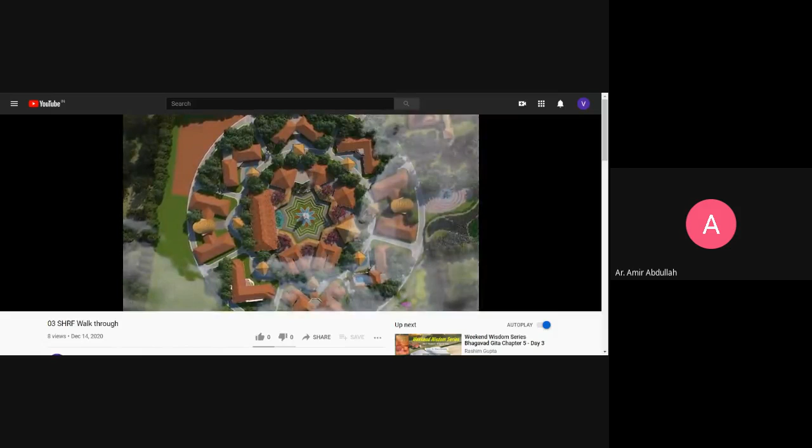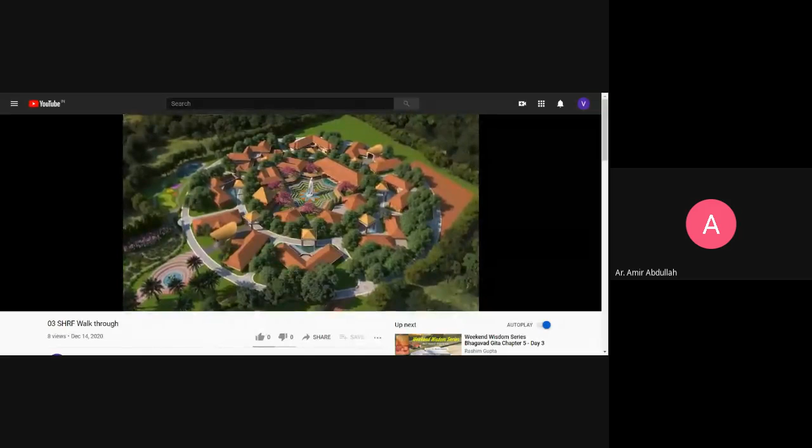Where the profound silence becomes the greatest eloquence, where the prayers pave a path to perfect salvation, where the soul within blends with the cosmic power. There, a divinity shines that cures and heals. Welcome to experience the power of meditation and yoga combined with spirituality. Divine Park, Sarvakshema Hospital and Research Foundation at Saligrama.

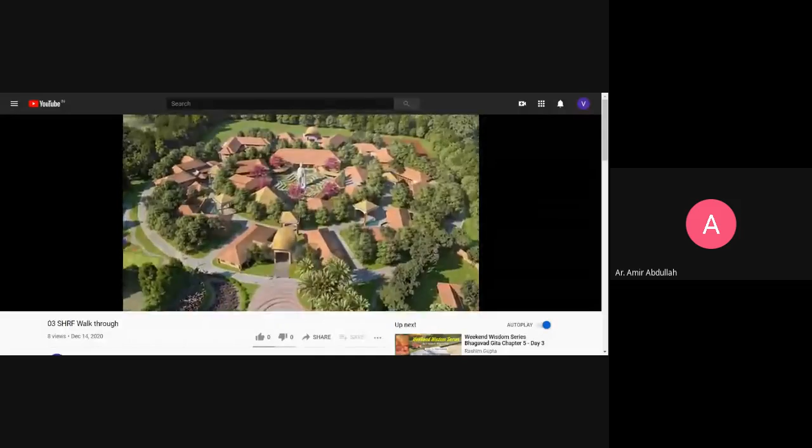Sarvakshema Hospital and Research Foundation is located in 11.4 acres of land amidst the serene environment, overflowing with the melody of nature. The entire area speaks of greenery and is preserved as nature holds it.

Eco-friendly ponds along with step seating facility, flower beds, shaded trees with benches underneath, reflexology walkways, all together enhance a tranquil ambience. A large area is given to the cultivation of a herbal garden with a variety of medicinal plants.

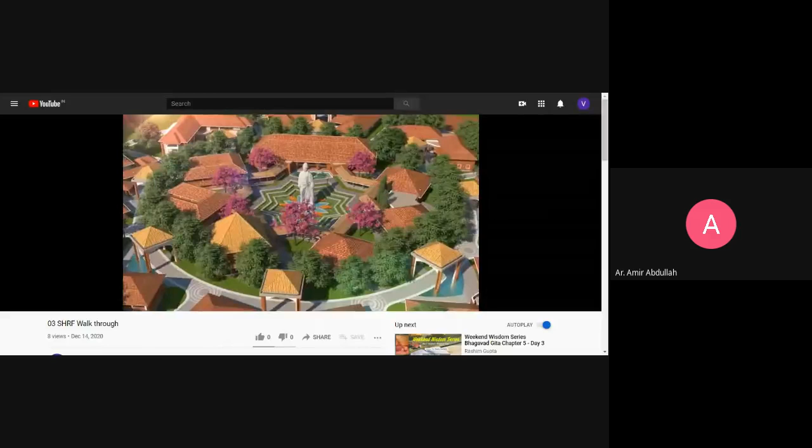Centered by a huge lotus, the hospital complex is unique in its design and layout, around which the yoga studio, meditation block, naturopathy treatment block for both male and female, dining hall and consultation block stand connected. Behind these, the facility of deluxe rooms and cottages, inpatient and outpatient block, Tulasi block, research block are arranged.

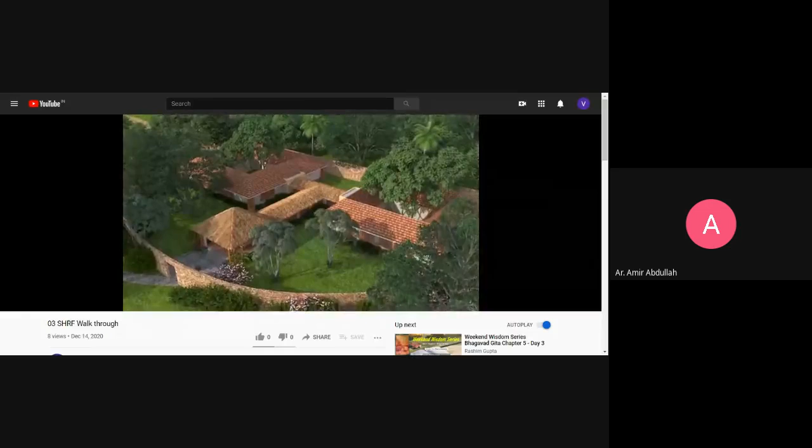A wide area is kept apart for sacred rituals and gatherings. The holy abode of Guruji is also within the premises to assure his blessings, and VIP cottages are nearby. The hospital is wholly constructed using granite, laterite stones, bamboo and other materials direct from nature.

A stone statue of 35 feet high of Swami Vivekananda stands in the center to welcome. The lotus flower, with its petals and steps around, is an appealing architectural magnificence.

Indeed, a fine place to rest and relax. Traditional charm is retained at all places with stone pillars, bamboo and tile roof, and well-connected corridors.

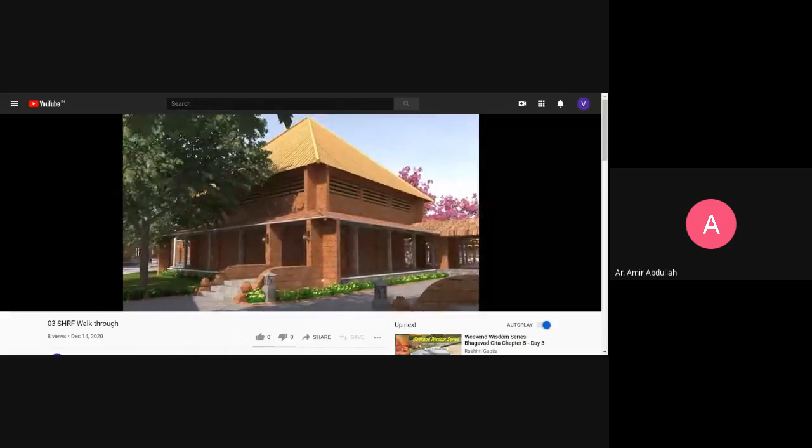Internal pathways are retained as walking and cycling tracks, giving easy access to all areas. A calm and comfortable meditation hall is also provided.

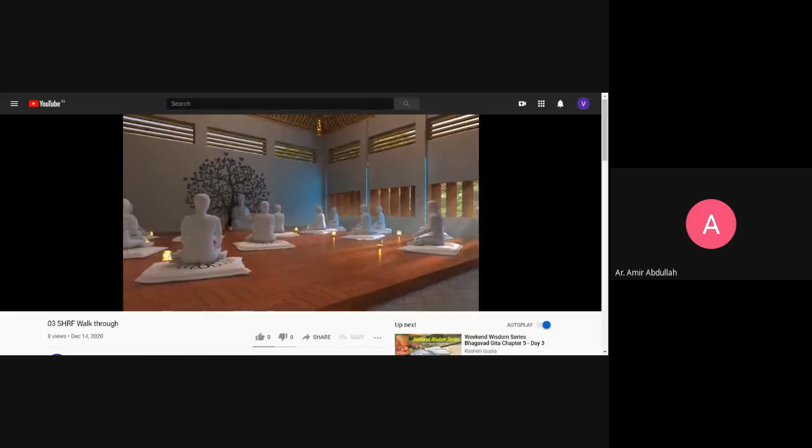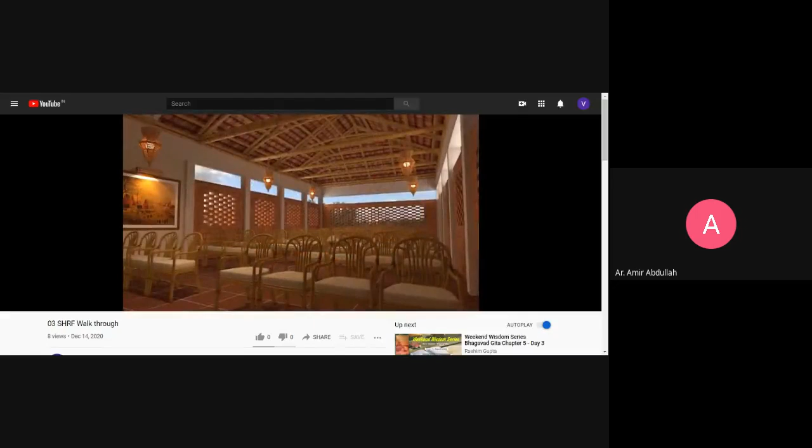The facility of a swimming pool with clear water, a multi-purpose hall, and a full-fledged yoga studio are provided. Sarvakshema Hospital and Research Foundation - a touch of healing from nature.

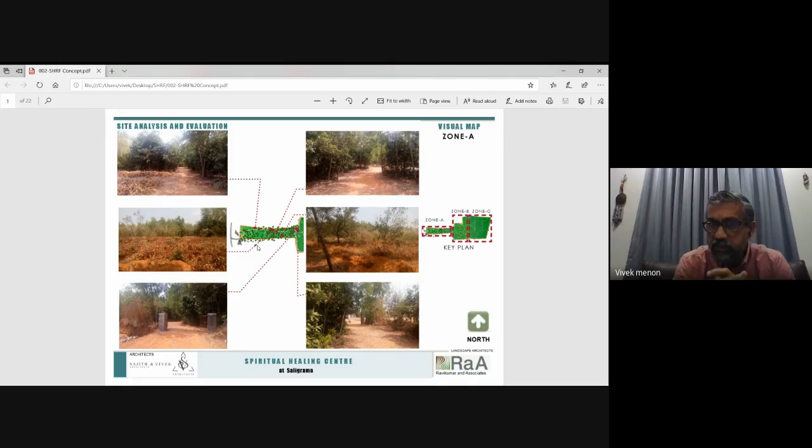When we came to the site, we noticed this first extended portion, roughly around 3.5 acres, and we were very clear there would be no development in that portion, because we wanted the feel of coming in through a healing garden. So we always conceptualized having some non-constructed area and treating it like a healing garden space. We were very clear at the beginning because it gave a very good feel and approach to the overall complex. Subsequently, as you go to the rear portion, the site gets a little bit bigger.

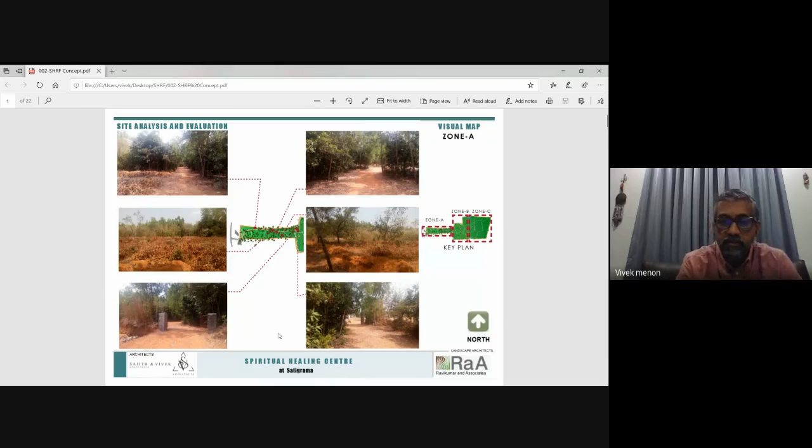So we thought that's the area where the development should happen, and certain decisions started forming in our heads. Now this is more toward the central portion of the site, where you can notice there are some existing trees, some wells, a sarpa mandapa, and overall some good trees.

More or less, we found that this was the area of the site with a relatively flat terrain, so it was easier to develop on this flat terrain rather than work on slopes, which would probably get very extensive on foundation works. Overall, this looked like the most ideal or plum area to put forth the structure.

As we moved to the rear portion, we noticed there were some rainwater natural drains around the property. We knew these had to be revived and recharged. We had 3 water bodies which we were clear we would definitely recharge and try to improve, creating catchment areas for the water.

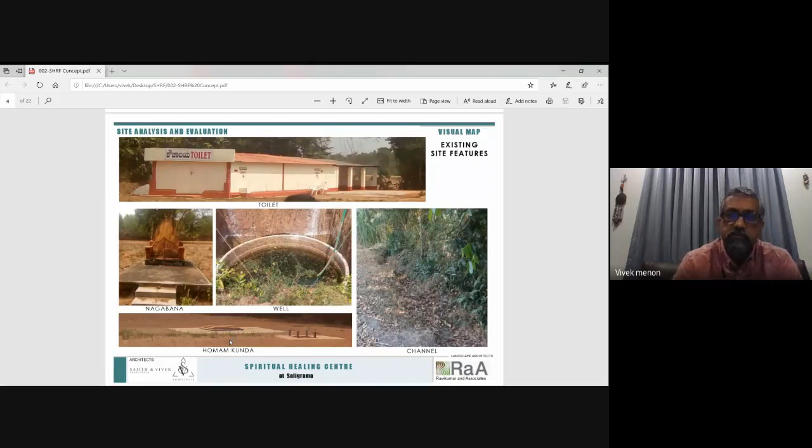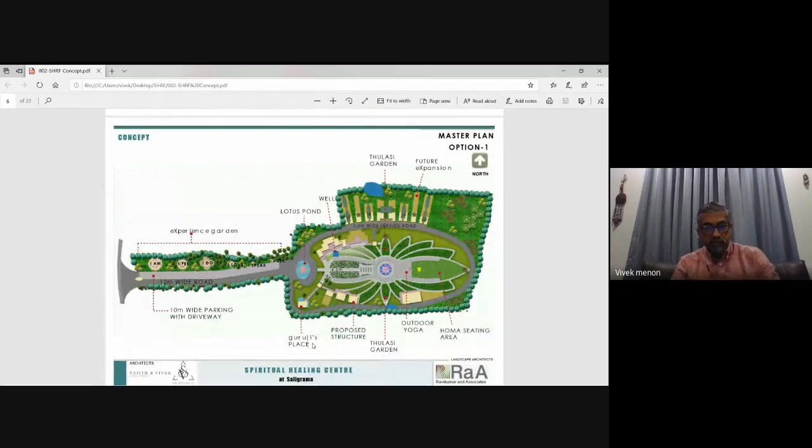Some vegetation analysis by a landscape architect. So now what we did is, before I go into the slide, we want you to understand what is the context based on which we are planning to design. The context here is nothing else but the fact that...

the client was very clear that he wanted a center which had the teachings of Vivekananda imbibed with yoga practices and training. So it was very clear that the context would be with respect to Vivekananda and his teachings and his outlook on life. So we centered our thought process on the design around Vivekananda, and then tried to arrive at some kind of concept.

To get into a concept, we did a little bit of reading and tried to understand what in nature can be emblematic of having faith, believing in yourself, or living an unwavering faith to live a better life. These kinds of things we were thinking. So it dawned upon us - why don't we look at the lotus form, which was quite popular also amongst Buddhism, Hinduism, and many other areas.

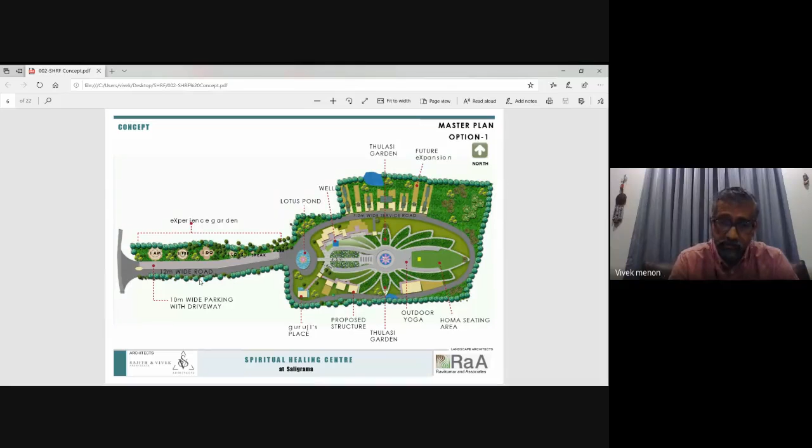We also considered, towards the northeast corner of the property, a huge open ground where they could continue to have their homa. The site was sloping from west to east, with a perfect exit point for water in the northeast corner going into an irrigation canal, so we were confident it would be recharged and kept alive.

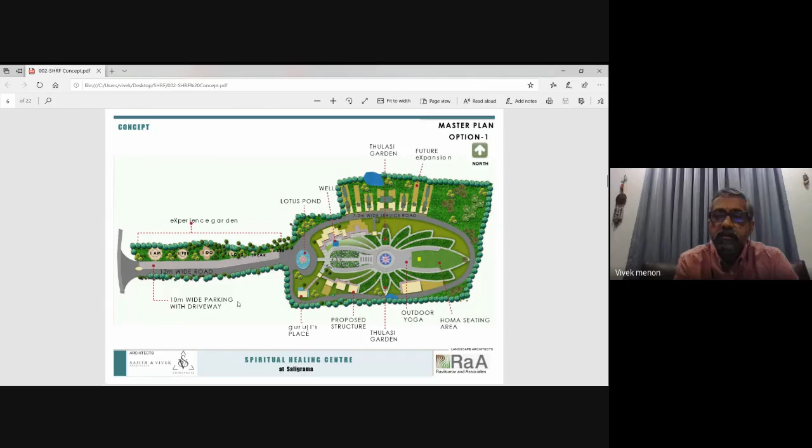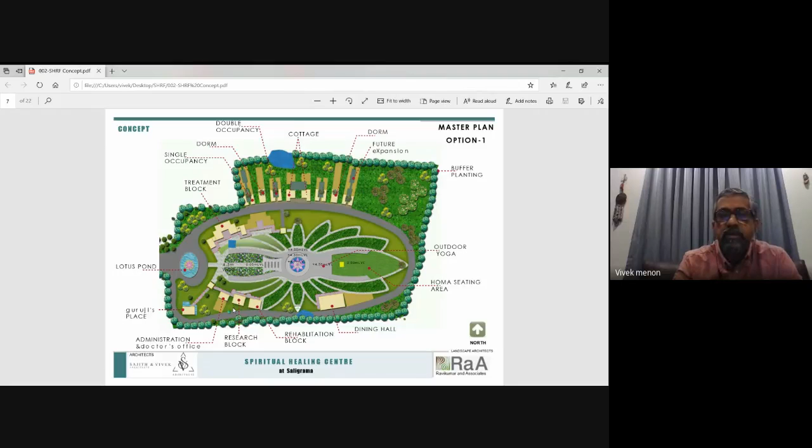So this was one thought process we had, and then we moved on to some visual ideation and started to arrive at a kind of massing study. This isn't completely done, but we were in the process midway.

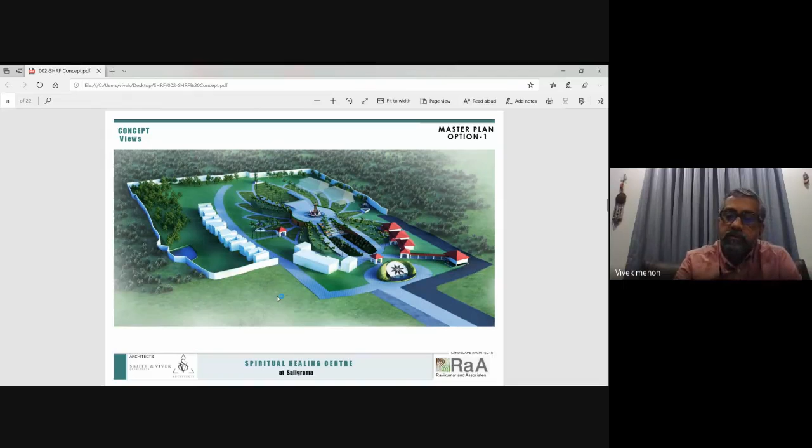The idea was to have a complex developed around this central plaza in a very elliptical manner. So that was one of the ideations we had—some sketches, then developed into 3-dimensional renders to give a feel of the space.

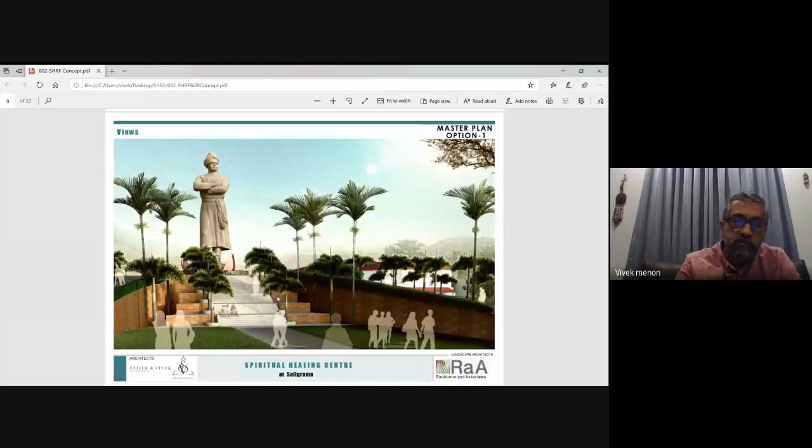And that was the first concept. Now, this is the second option that we worked on.

It's more or less the same concept, where we have the first area of the site not developed, and then we create a strong access point slightly pushed in. And here, what we basically did is...

created 8 quadrants radiating out into concentric circles, and we thought in those 8 quadrants we would provide the activities. Here too, at the center, there was a water body with a statue of Vivekananda, and our complexes around it.

So here we had a concept of phase one and phase two development. Phase one would be the inner ring development, and phase two the outer ring development. The rest is more or less similar—keeping the northeast open for the homam and letting the water exit.

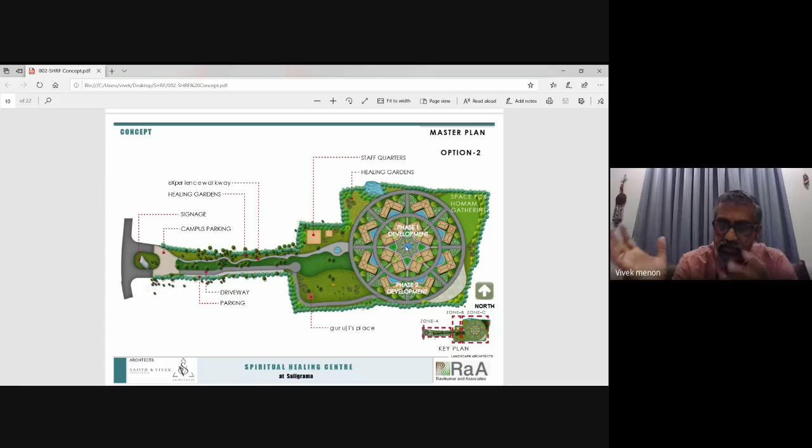So we were thinking of swales all around the property, so the water would be carried from the entire site to the northeast corner. Then we had ideas for services, everything integrated.

As you go further, just to give you an idea, we felt this was a better option, so we started looking deeper and deeper into this.

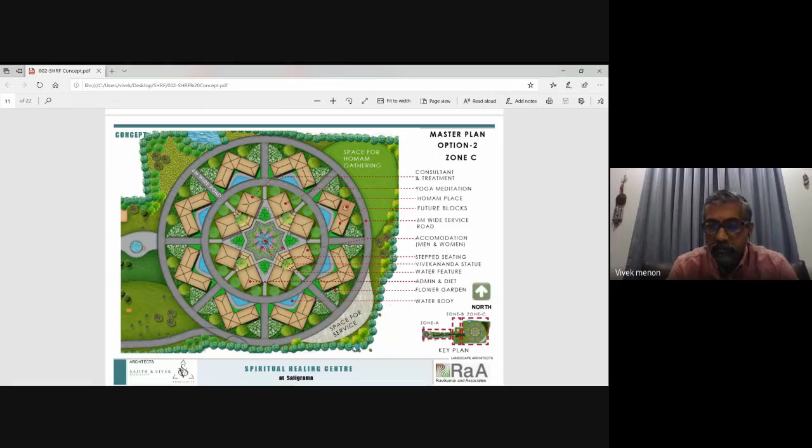This is just an enlarged view of the central complex, where you see the two concentric circles, which are basically driveways and pedestrian walkways—wide enough for vehicular access in case of emergencies, with widths of 6 to 9 meters.

So you see the central core, and then you have the water body in the center, and you have all these building complexes overlooking the central core.

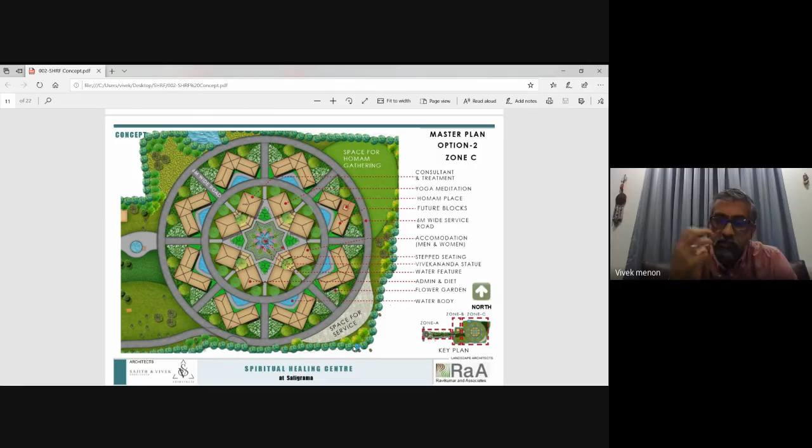Here we struck a good thought process where we felt that his philosophy and teachings are always that you need to try and understand yourself from within, because the saying goes that if you talk to yourself, you realize you have a very interesting person inside of you. So we thought this kind of concept makes the buildings look inward, so that everything starts from within you. This was giving a better feel of a central core and looking-inward concept. We were really excited about this concept, and we went forward with it.

So just showing you how phase one could be done, because projects of this scale will end up having different phases of development for various reasons. One could be that the initial start may not have much in terms of customers, and even your funds; you need to have the funds in place. So they wanted to start small and then grow bigger. Future expansion is always important.

If you notice here, you see the 6 meter wide roads which connect the inner and outer ring, which are basically pedestrian walkways.

Now, one important thing about this project was the client also gave us a daily routine as to how a person should start his day and end his day. So we had a time-wise schedule starting from 5:30 in the morning to 9 in the evening, organized in such a way that they're trying to set a kind of regimen in your life, because that will obviously improve your health. So that's a very important part of their program here.

So these concentric walkways always made it good for them to have their walking. They have some kind of calculation where you need to walk a minimum of 9,000 or 10,000 steps, which is good for your health in a day. So these concentric circles also gave us that design requirement to be provided.

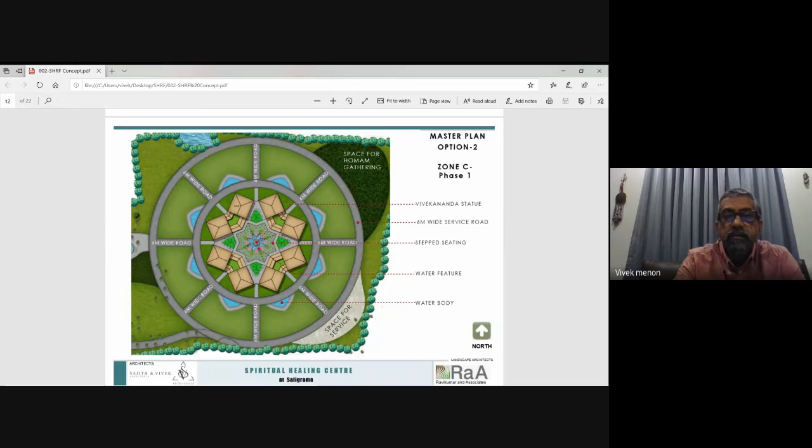So just showing you how the entire thing would happen in phase two. Just a comparison here - basically not much different, but we have connecting corridors and walkways in between the blocks. So we have kind of a stellar form in the center, but on the outer sides you have a circular form. Some Google SketchUp renders.

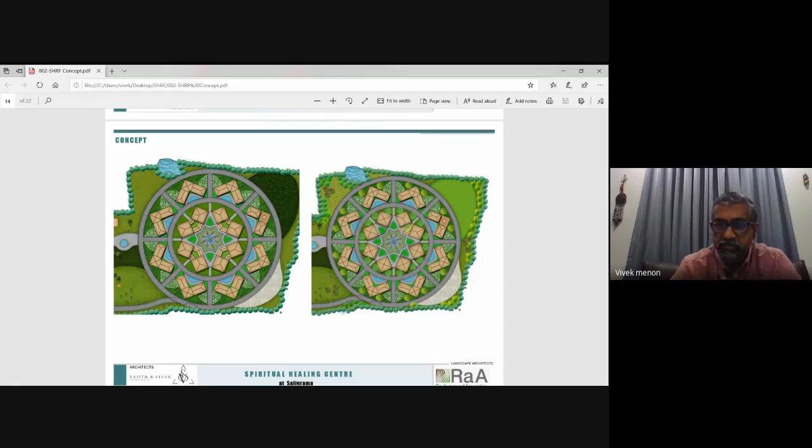So what happens is, if I go back a little bit, in this kind of design there are so many open vista points between these buildings. You never feel like you're walking between dense structures - there's so much openness between them. You have connecting walkways, landscape patches, water bodies, and you get a beautiful view towards the central focal point from many locations. So you really get to enjoy the central core from all around.

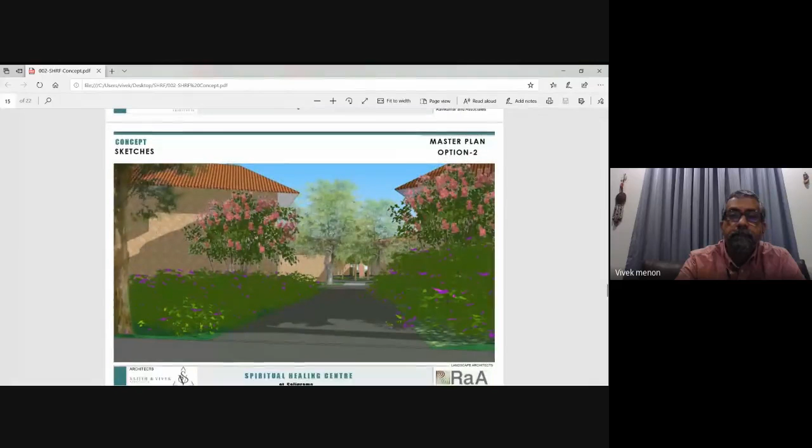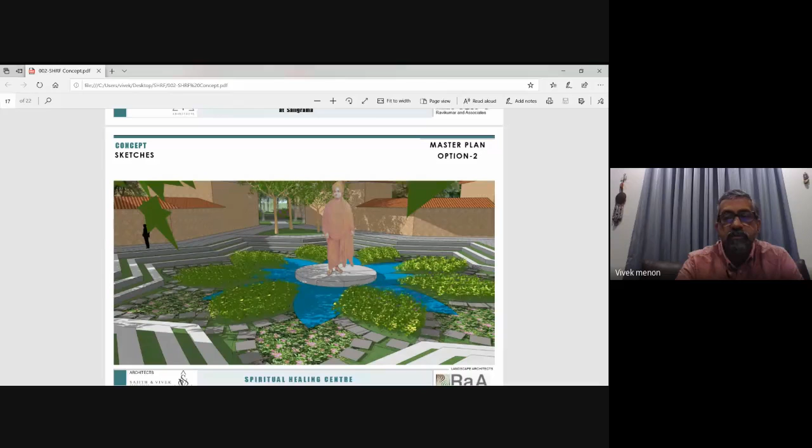So this is one good thing about this kind of design - some views between the structures, a little bit of the stepped seating, central plaza. We have the Vivekananda statue, and we wanted some lotus flowers and other flowers, flower beds. It becomes a very interactive space for discourses.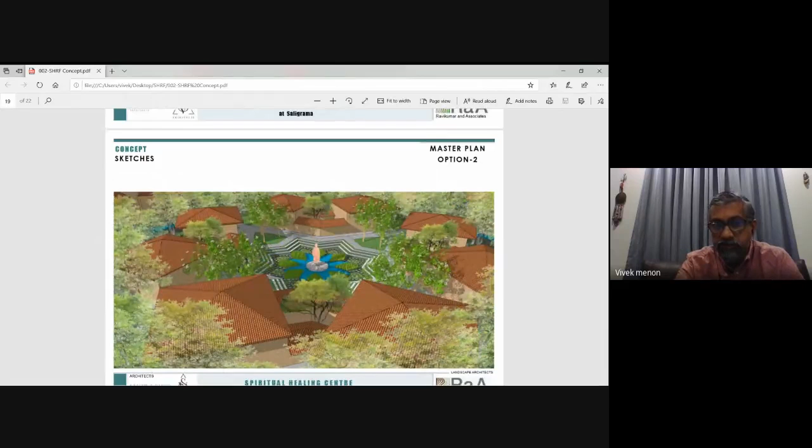I hope I'm not moving the slides too fast. Are you able to see? Yes sir, it's visible properly. Yeah, but am I moving too fast? Is the slides moving too fast? No sir, I think it's all right, okay.

An overall aerial view of the complex.

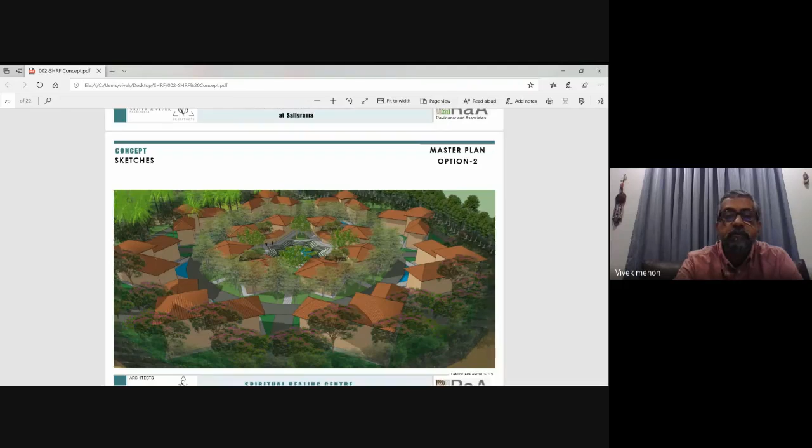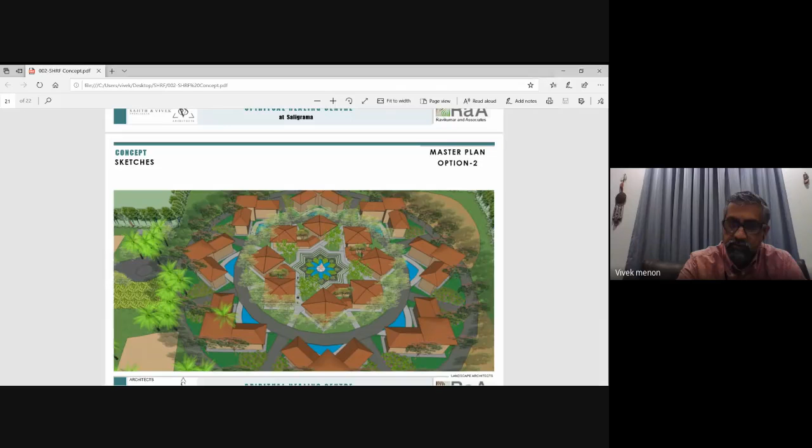So I want you to understand this is all conceptualization, please - this is part of the conceptualization, so this has not become concrete as yet. What I showed you in the video earlier was something that became concrete. What I'm trying to do is walk you all backwards. I'm trying to show you that the walkthrough was something we kind of decided we wanted, but this is what was prior to that - how did we get to the walkthrough is what I'm trying to share. So this is all before the walkthrough happened and the design was selected. That's why I'm showing option one, option two.

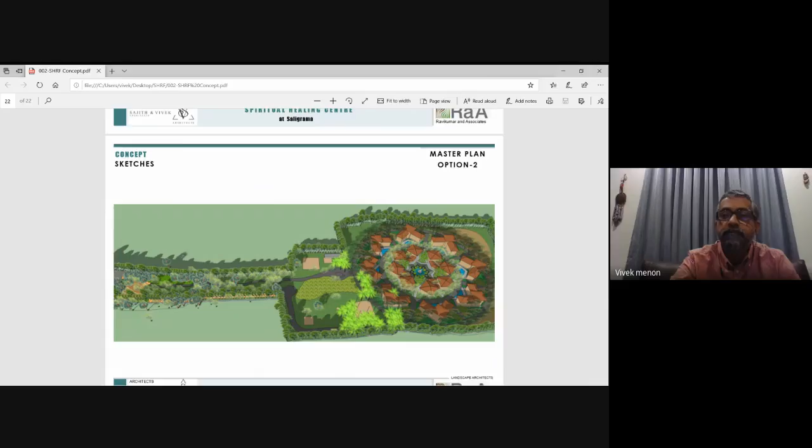This shows the entire site. Now this is very important - this is something I'd like the students to understand. Here I'm just going to focus more on activities on the site, which is very, very important for a project of this nature, or in fact for any project. If you get yourself involved in the site, it's very nice because you can see how the product turns out.

Basically, this is going to show you a bit of the construction drawings, so you can understand the construction areas, showing you the building plans and things like that.

Central core, so phase one was taken up. The central core area was to be totally developed, and we had two meditation halls, a research block, a big auditorium and a dining block. We had proposed the outpatient and office block and an accommodation block.

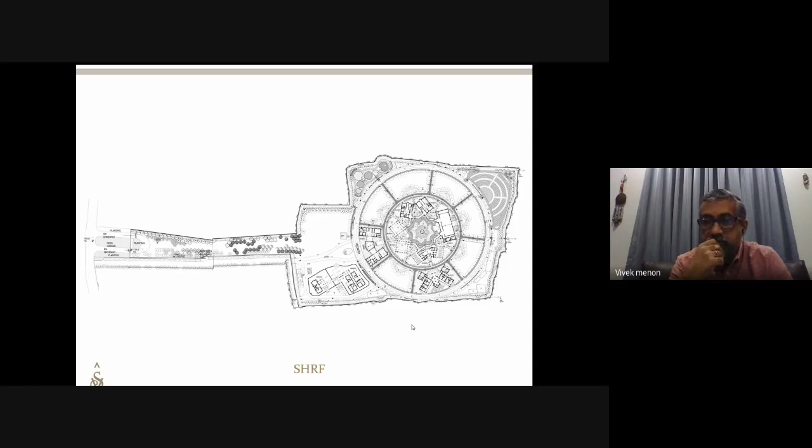Initially they did not want to go up for the entire built up area, so as of now, phase one development is at 60,000 square feet. It's good to know there's a lot of places for future expansion. So all these vacant grids, we have requested them to treat as nurseries, because you need a lot of vegetation to be done around this property. They will be treated as nurseries for the moment, so by the time you can replant them and move them to their respective areas. This is a suggestion given to them.

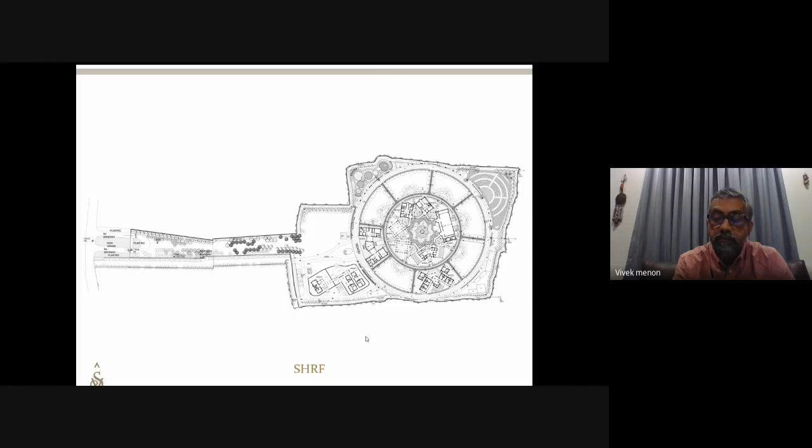Just showing you a little bit more closer view of the complex. Do you see my cursor actually? Yes, it's visible. So this is the administration and the outpatient block.

So we created a kind of grand imposing entrance here, and then through here you come into the central core complex, at the center of which we have stellar seating, a water body, and a Vivekananda statue. We decided that we'll try to put up a statue of Vivekananda, almost 30 feet high, which would be the main focal point of the design.

And if you come into the inner circle, to the left and to the right immediately, we have the meditational blocks. Then to the left, as you go in a clockwise direction, we have the research and treatment block. The long elongated block towards the northeast is the auditorium block, then further down is the dining block, and behind the dining block is the accommodation block. So we have around 75 bed accommodation provided here.

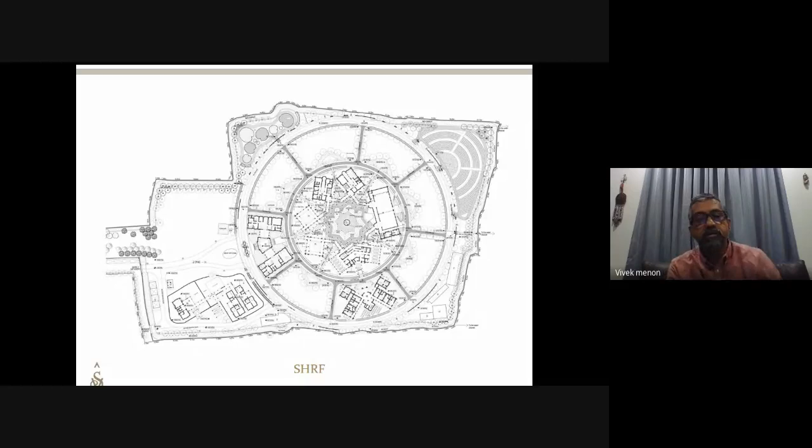So this is what I'd like to show. This is very interesting, I think a very important part of the entire project, according to me, because I am also new to doing work in Karnataka, especially towards Manipal, Udupi, Saligrama.

There's a lot of these materials available, and I was really excited to try out laterite, granite, and tile roofs. Yes, we've used a lot.

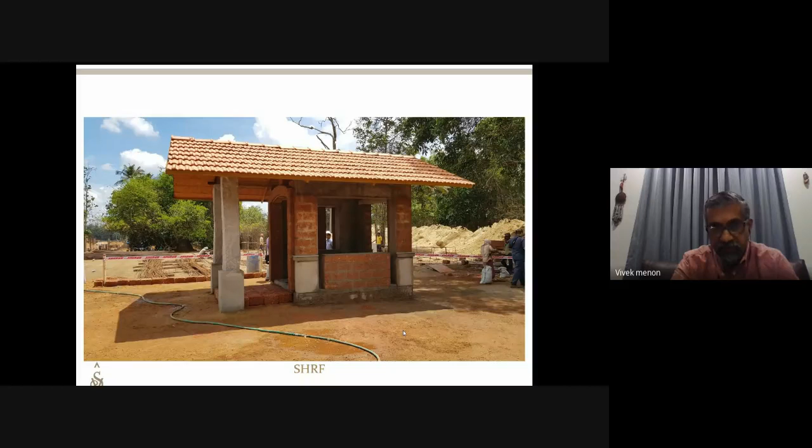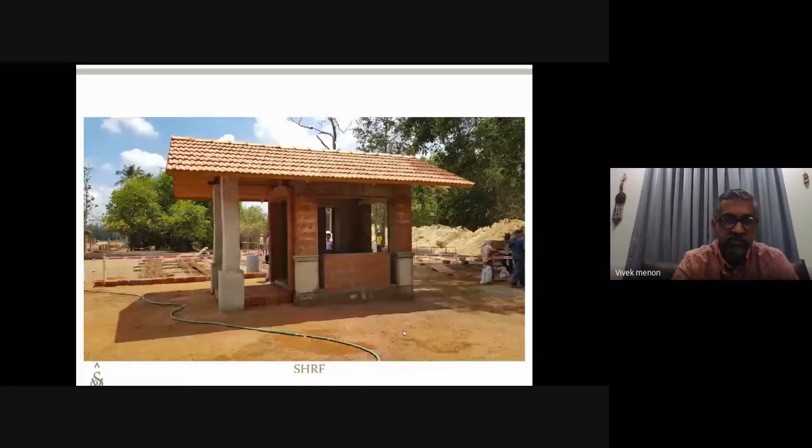Surprisingly, these were things done many years ago, but today these are things which are getting more and more difficult to do. By doing this exercise, I was somehow able to clearly drive in a message to all the consultants and the client: this is the look and feel that I'm looking at.

So we started comparing the size of a laterite stone with the granite pillar they did as a sample. We reduced the sizes to the width of a laterite stone, but we felt this was too bulky. The mock-up done was too bulky.

We also wanted to explore the concept of using bricks as a kind of louver to funnel in the northeast and southwesterly winds. At the same time, these vertical fins would act as normal security grills provided into the room. We wanted to avoid normal metal grills, and thought these fins by themselves would act as security grills to all the spaces.

So we made sure the north and east facade of the buildings had the louvers focused in that direction, whereas the southwest sides had the louvers focused in the opposite direction. It was all looked into, and this became an interesting element of our design. So we tried with laterite, and then we took up with bricks. Ultimately we ended up doing it with bricks.

But we had a lot of problems with this because it seemed to be taking a lot of effort, so people didn't want to go there. The contractors didn't want to go there either. So we thought of using these old concepts of granite lintels, and got a mock-up of that done.

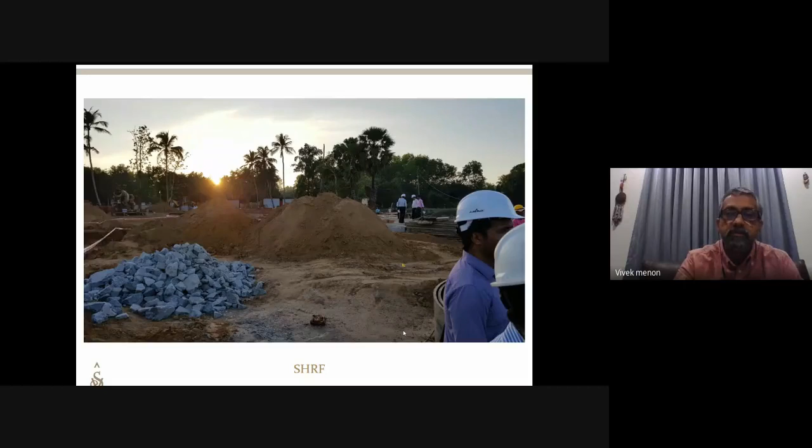So when we broke ground, we started moving forward, and if you notice, everyone is involved. We had some drone shots showing how the work progressed, and today it's very nice to have these drone options to really monitor and understand how your project is shaping up. This is one great thing happening today - being able to use drones to capture a lot of imagery, and monitor construction activities very well this way.

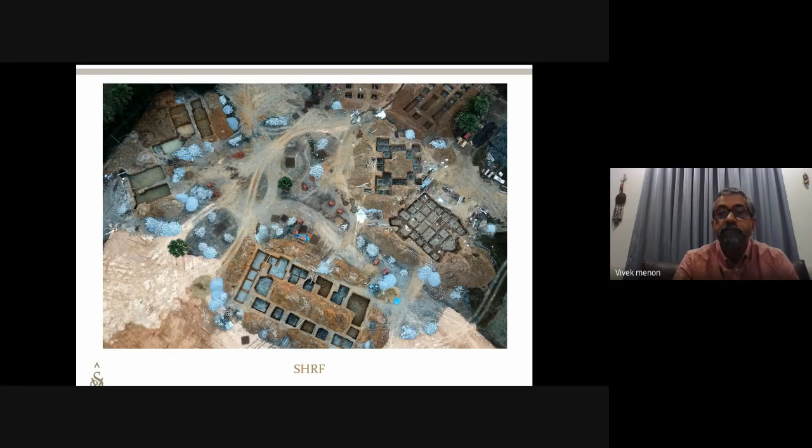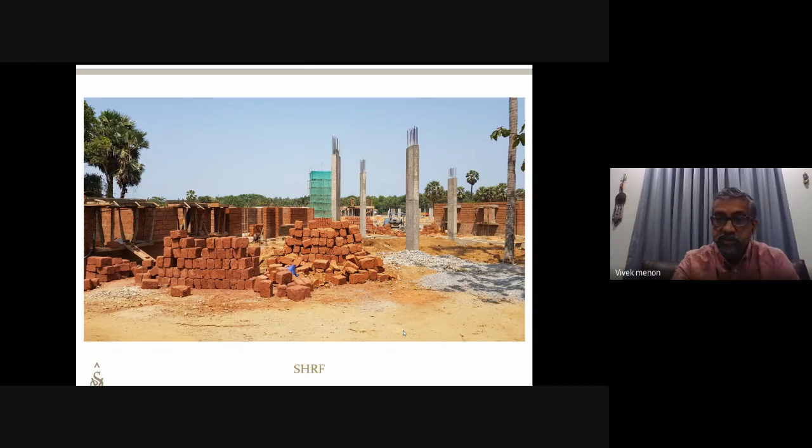Now since we had to do phase one, and phase one was the inner circle, it was very clear that we had to put up the statue at the same time as doing the inner ring structure. So we started putting up the statue also, because we couldn't bring in the statue or do it at a later date - it would be very difficult.

The soil was pretty good, so we didn't have to go for any kind of deep foundations. Then we had plinth beams, with laterite masonry on top.

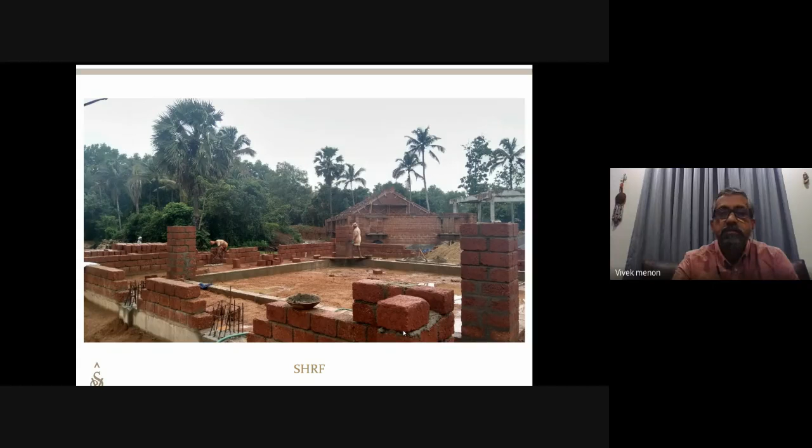Somehow I went ahead with the idea of doing laterite, because the contractor and everyone kept coming back saying you're going to have problems with fungus, problems with that. They were trying to make me reconsider using laterite, but I was kind of hell-bent that I wanted to use it.

Their concern was rainwater lashing against the walls and fungal growth on the wall surfaces. So what we decided, subsequently, was to plaster the walls from the ground up to almost 4 feet in height, and we changed our overhangs from the normal 2 feet to 3 feet in length. So we changed a little bit of the standards to make this workable, and I think it's come out fairly good actually by doing that.